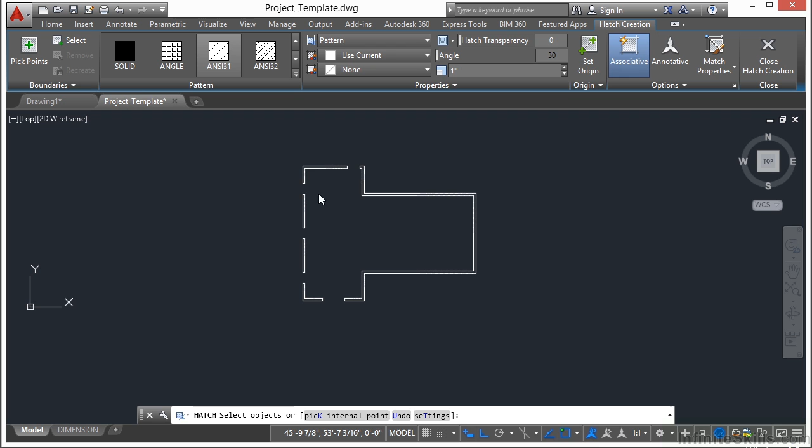We want to use a hatch pattern of ANSI 31, with an angle of 30 degrees. Let's pick inside our objects. You can zoom in, we're going to use the pick points option. Click in here. That pattern is a little too tight, so we're going to give it even more. Let's set that to 20, and that looks good. So that's the pattern we're going to use: ANSI 31 at 30 degrees with a scale factor of 20.

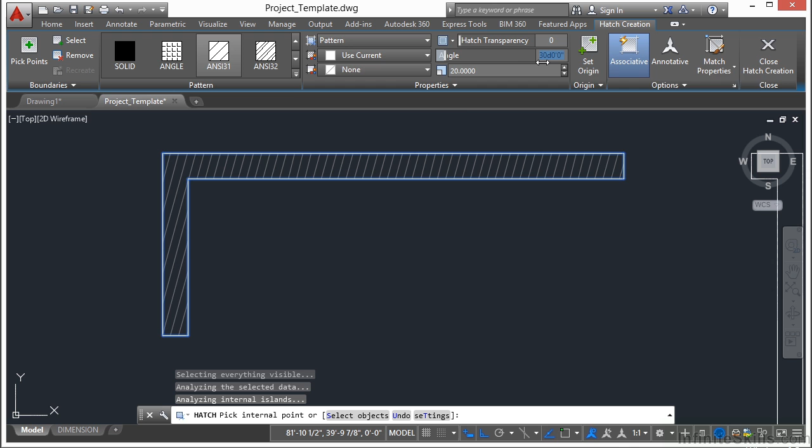And we're going to pick inside each of these objects. Sometimes when you zoom in too closely, AutoCAD just kind of freaks out and it can't handle it, so you just have to zoom out a little bit, pick in the exact same spot, and it still works. I know it's crazy, it's really annoying. That's just one of the little things about AutoCAD.

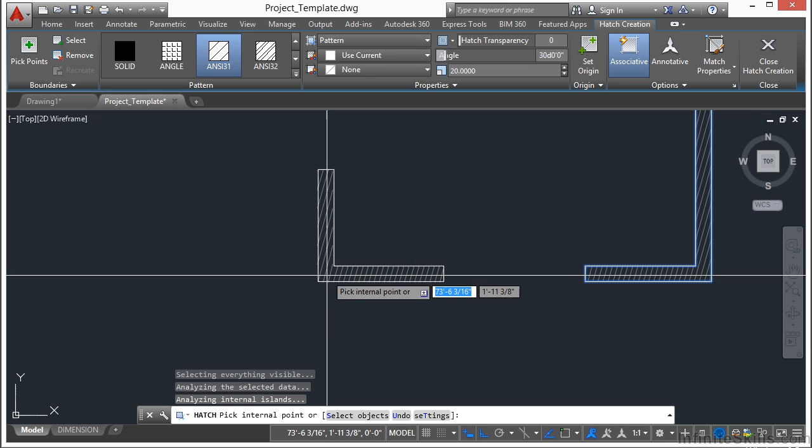So just keep filling in each of these wall sections with your hatch pattern until you get them all filled in. When you're finished, press enter. So there's our exterior wall with a little bit of a hatch.

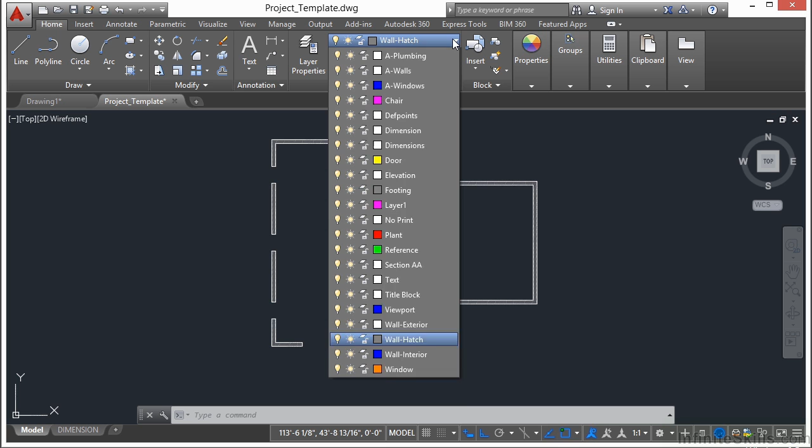Now we need to put in a few interior walls. So let's change our layer, we're going to go to Wall Interior. Start the line command, and we're going to start off right here, snap to this endpoint, and just draw it straight down to this endpoint. Press return. Now we're going to offset this line.

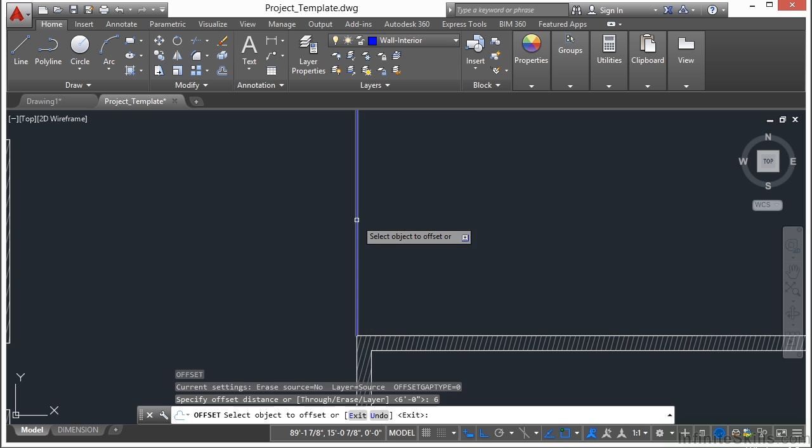Offset it 6 inches, and offset that to the right. Now we need to offset from the top 12 feet, press enter, and we're going to select this line here and go down. There it is.

Use your match properties command, type in MA, press enter. Since this is going to be an interior wall, select one of your interior walls that you've drawn here and select that item. That way it will look the same.

Use the extend command, select this line here, press enter, and pick that one. Press return again. Now we need to offset this line, make it 6 inches. Pick that and to the bottom.

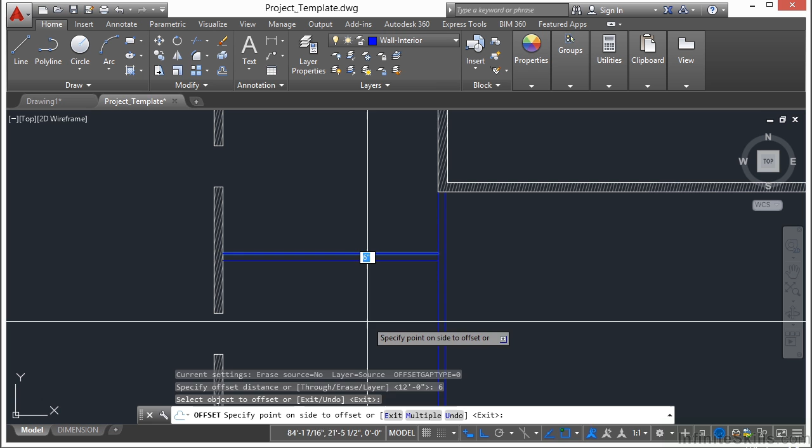So now we're going to put a doorway in right here. We're going to use the offset command, 1 foot 4 inches, press enter, select that line, offset to the right. Offset again 3 feet, press enter, select this line and offset it in.

Now use match properties again. Type in MA, select this line, and then pick these two, that way they're all on the interior wall layer. Use the trim command, select all these items, press enter, and trim it up so that we have this nice little opening. Now we're going to put a little doorway here.

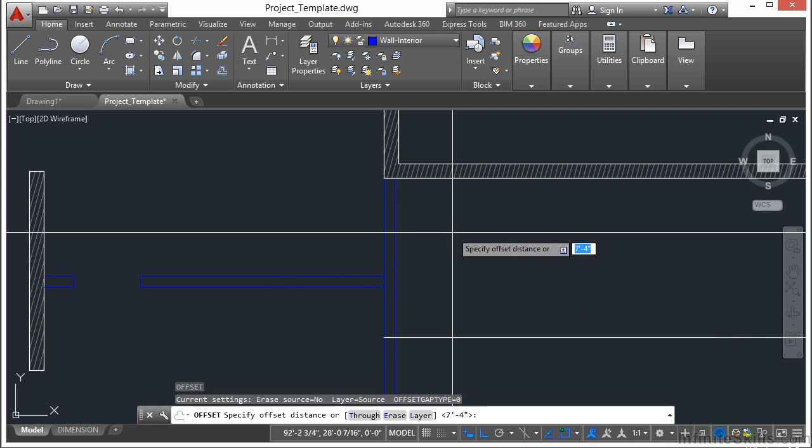Offset again, 7 feet 4 inches. Select your line here, move it down. Press return, offset 6 feet. Select the line and go down. Press return.

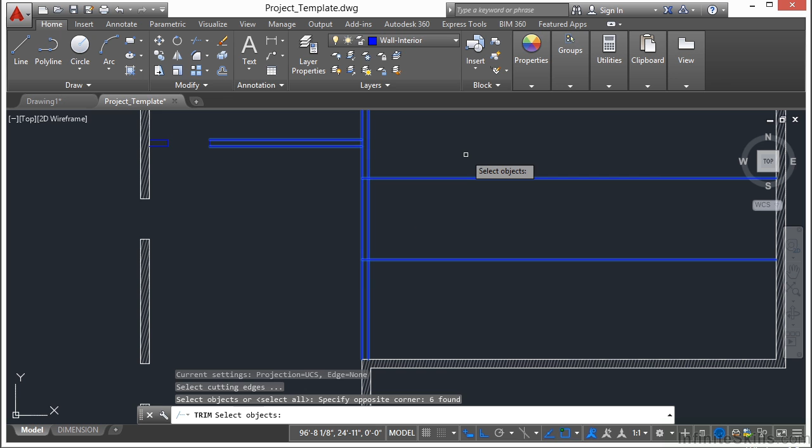Type in MA for match properties, select the blue line and then pick these 2 white lines. Press enter and then trim. We're going to trim all of this up here, so select all of these lines. Press return, trim those away, and get that little bit out of there too.

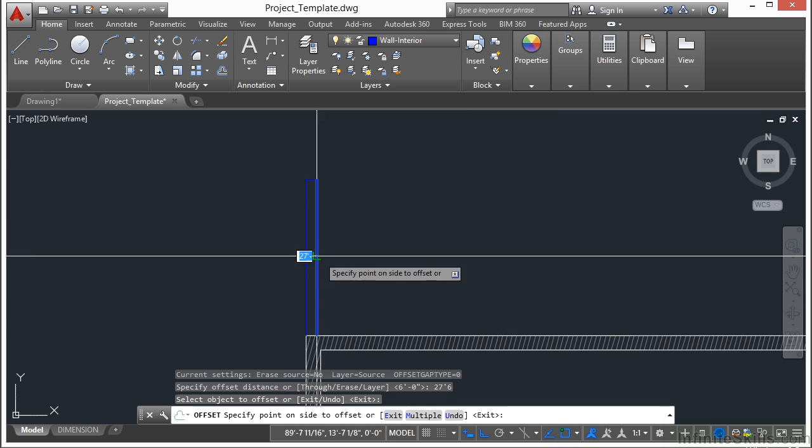So now we have our exterior walls, we have our interior walls, and the last thing we need is to put a little movie screen. We're going to offset 27 feet 6 inches, pick this line here, go to the right, click, and return. And then use the extend command, select that line, press enter, come down here and pick the blue line so that now it goes all the way across our room.

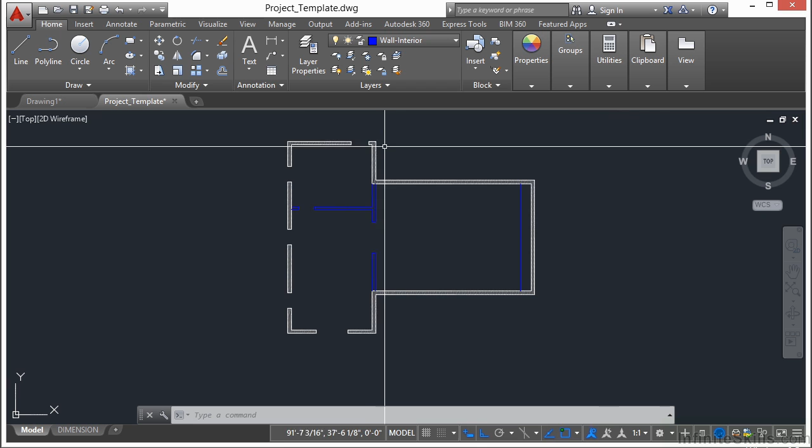And now we're almost done with our model. We just have a few more things that we're going to do in the next section. We're going to insert the doors, the windows, some plants, and some chairs.